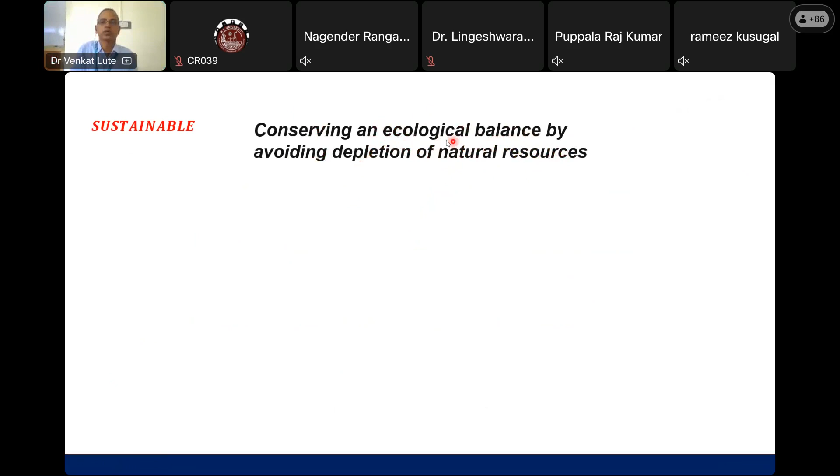Coming to sustainability in construction practices, we know what is sustainability. By definition, sustainability is conserving an ecological balance by avoiding depletion of natural resources. It's a very important aspect because natural resources are getting depleted. We need to do something about it, and there must be ecological balance. So one of the important aspects of this is steel construction.

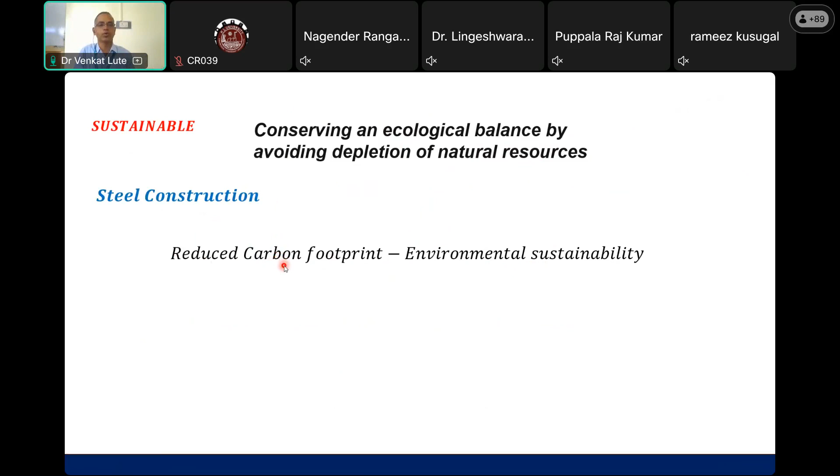We'll see how. The first aspect is the reduction in carbon footprint, which relates to environmental sustainability. If you look at concrete construction, there's a lot of carbon footprint. If we somehow avoid construction using cement material, we can be environmentally sustainable. You may ask about the byproduct from the steel industry—of course there's some problem, but it's much less compared to the carbon footprint from cement production.

We can use this byproduct of the steel industry again in concrete. Somewhere we can use it in roads and so on.

The next aspect is reduced cost and construction time, which is very important because it leads to economic sustainability. Fast construction and reduction of time basically comes back to cost. If there's a delay in construction of big projects, every day could cost a fine of 1 crore. If you do it early—recently we saw in Punjab a 40-story building constructed in 48 or 72 hours—early construction will definitely give rise to the economy. So that is again sustainability.

Next is the reuse of material. This is the most important aspect regarding natural resources. If you look at steel construction, once it's not in use, a large percentage of the material can be reused, so you're not wasting natural resources. Whereas in cement concrete, we're not able to use it to that extent—maybe maximally 20 to 30%. So this is again the sustainability aspect.

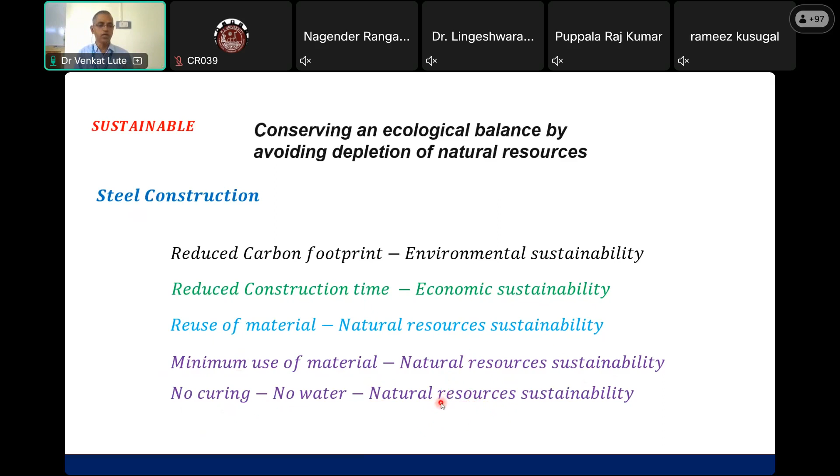If you look at concrete construction, we need a lot of water for curing. In steel construction, we don't need water. That means I'm saving natural resources, and nowadays we can see that drinking water is very scarce. So I can avoid wasting that natural resource. This way we are saving natural resources, which definitely means it is sustainable.

Now let us look at a concrete structure and how steel has come up, and how we are wasting concrete material. That means we are wasting cement, which means you are not sustainable - that is carbon footprint.

For example, I have a concrete beam supported on two pillars, subjected to a 2-point load. What happens? The shear transfers to different locations, and diagonal cracks appear here - this is a flexure crack and a diagonal crack. That means at one point I have a maximum stress zone, and at other points I don't have much stress.

So the idea came: why should I waste material? If I try to draw the stress path, the stress contour, I can see these stress contours. This red part looks like my truss - this being a tension chord, this being steel ties, and the compression chord.

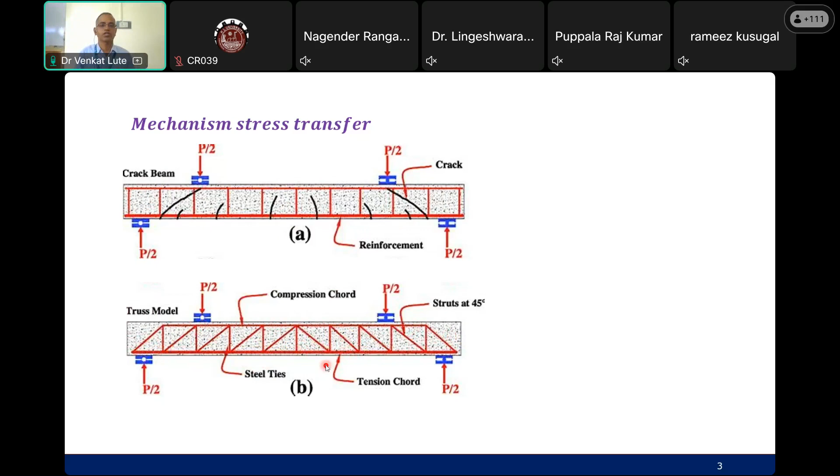Now another way I can show you how I'm able to save material, which is again sustainable - for example, transmission line towers. If you look at these towers, imagine I have a concrete structure - a huge structure. But if I use steel, the entire structure has either tension members or compression members.

In between there is a lot of empty space - that empty space is where I'm saving material. Whereas if I use concrete, I'll have to have a complete solid structure, with more carbon footprint and lot of environmental unsustainability.

Similarly, microwave towers - you see a lot of openness. Second important thing is your loads are also reduced, particularly wind loads - when wind comes, it passes through. But with a concrete structure, there are heavy wind loads, meaning a heavier, less economical structure. That's how steel structure is sustainable.

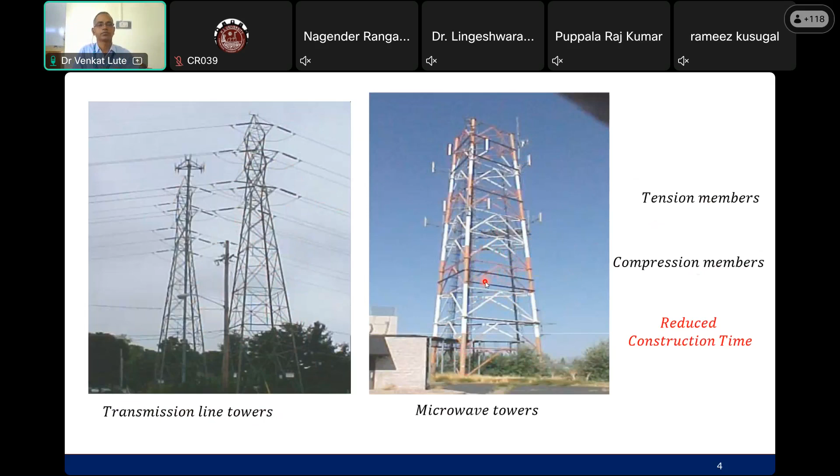This is very important. Specifically, now I am going to talk about pre-engineered buildings in my presentation. I'll start with sustainability in steel, and specifically pre-engineered buildings, which is a very important topic - pre-engineered building energy efficiency.

If you look at the structure here, are you able to see my pointer? I'm giving a pointer here - the red pointer. Anybody can answer. Sir, yes sir, it is visible. Okay fine, so I can indicate through this.

So this is the building, which is pre-engineered, and if you look at the windows with a glass facade, there's a lot of openness and lighting efficiency. We don't need daytime lighting at all, and we can open the windows for ventilation - we don't need AC. This is possible only with steel construction, specifically pre-engineered buildings. You can use solar panels, insulated panels, large windows, and natural lighting is possible - this is the advantage of pre-engineered buildings.

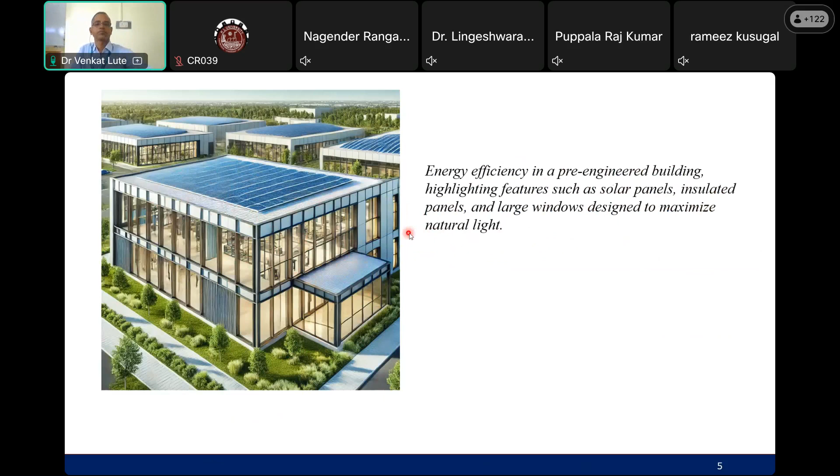Now, the question may arise - what is a pre-engineered building? Pre-engineered buildings are a type of building construction wherein the entire structure is pre-designed and prefabricated in a factory, then brought to site and assembled. So this is one such structure.

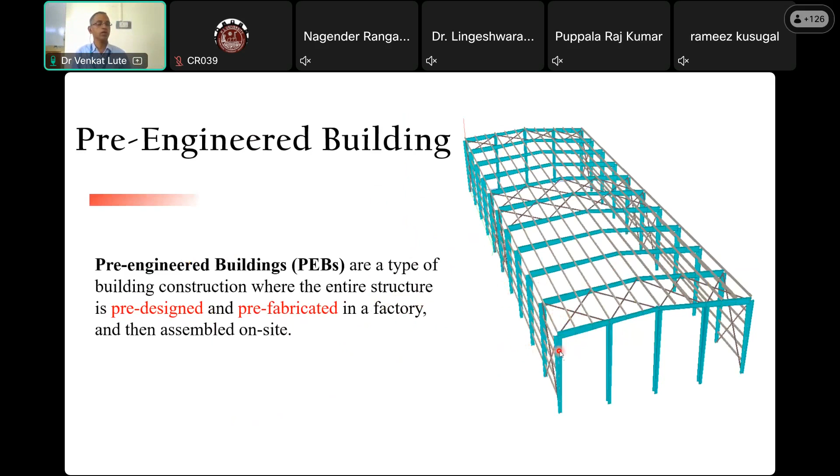So these pre-engineered buildings are generally for factories and industrial buildings, but nowadays people are going for residential buildings also. So these are the contents which I am going to present, the entire design of a pre-engineered building: full design, how to start from the basics, how STAAD software can be used to analyze and design, what are the components for design, and finally we can conclude. We'll try to go a little faster and see.

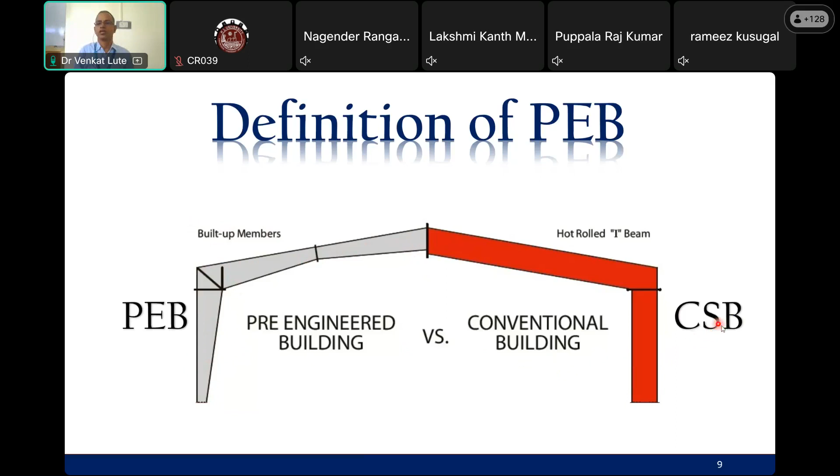So as per the bending variation, I have a cross section, that is called a built-up member. I can make a built-up section. These are called varied cross sections, meaning the flanges - I'll show you the flanges here - so the web plate will be varying from the bottom till the top. So this is the cross section variation in the PEB structure. This is the conventional steel building, and this is the pre-engineered building.

Now, if you look at the structural components of the pre-engineered building called PEB, there are a number of frames, and as per codal requirements, the first and second frame should be connected with bracings, and similarly at the end. If the length of the building is more than 50 to 60 meters, then the middle frames also should be provided with bracings. That is the stability aspect, not the strength aspect.

Now the components like the column, this is a rafter, and then this is a purlin, which is going to carry the sheet on top. And on the side, the same purlin, when provided to the side column, is called a girt, and at the ends and middle we provide bracings. So these are the components.

So each component I need to design, very important. Not only that, it is not just a component - how do you connect this column with this rafter? And there are additional columns called wind columns. These three are wind columns, only provided at the support.

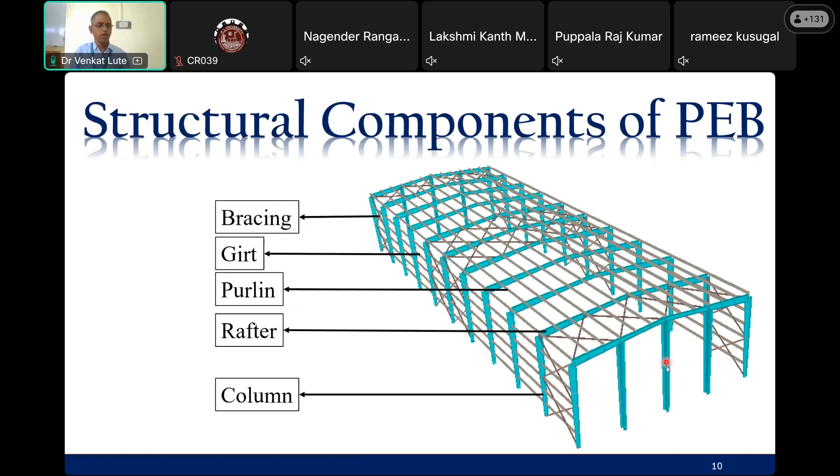I'll also show the full dimension of this building in the coming slides. Total building length is 60 meters and width is 20 meters. Each of these frames is spaced at 6 meters center to center, and the purlins are spaced at 1.6 meters center to center. This is very important for design economy - economy leading to sustainability. So now economy between my purlins and the PEB frames.

This red one is a PEB frame and this gray color one is the purlins. Now, should I increase the spacing of the purlins, which reduces purlin cost but may apply more load onto the PEB frame? So total number of PEB frames versus total number of purlins, then what is the cost? I have to use optimization here. At the same time, what is my covering material - GA sheet, asbestos, or any other corrugated composite material for covering the shed. Based on so many parameters, I have to decide this spacing. This is a very important area where I can do optimization studies, and rafter inclination could be another optimization study.

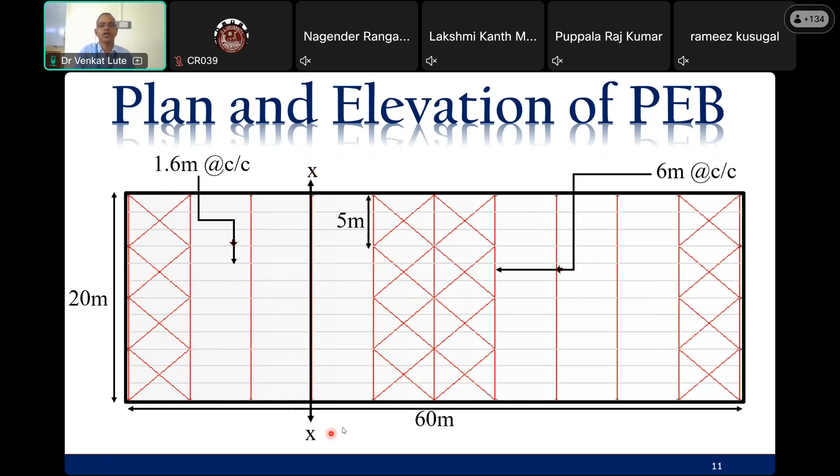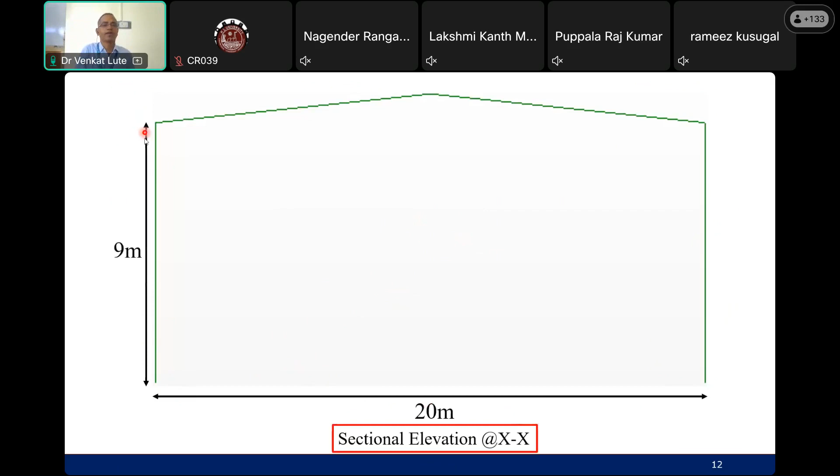So if you look at the XX section here, this is the cross section of a PEB frame, with a 20 meter width and height of 9 meters up to eave. Now total height at the peak is 10 meters, meaning the inclined portion is 1 meter - roughly a slope of 1 in 10 to 1 in 15 provided for the rafter.

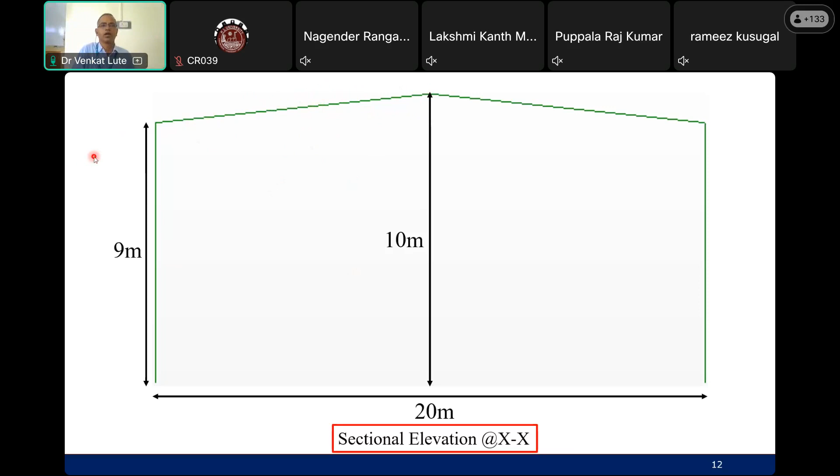This basically means you need to drain out the water properly, and at the same time you can go on top and do required services. If it is a very high slope, serviceability is difficult - maintenance becomes difficult for the person doing the job. Also, any other material falling onto it can easily slide down, which will not lead to a higher dead load onto the structure. Now the slope here is 1 in 10.

So now at the end, what I have are three different columns. This end frame is the wind column, because the end frame has to be very strong, since wind is applied onto the end frame from this side. From the other side, again this frame. So if this frame is strong enough, the rest of the frames connected by the purlins will give stability or strength to the longitudinal direction of the building. In the lateral direction, I have a lot of this rigidity from the frame.

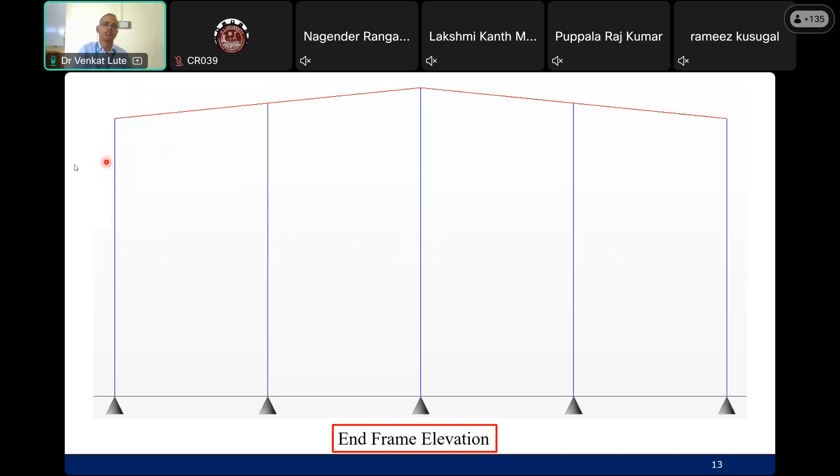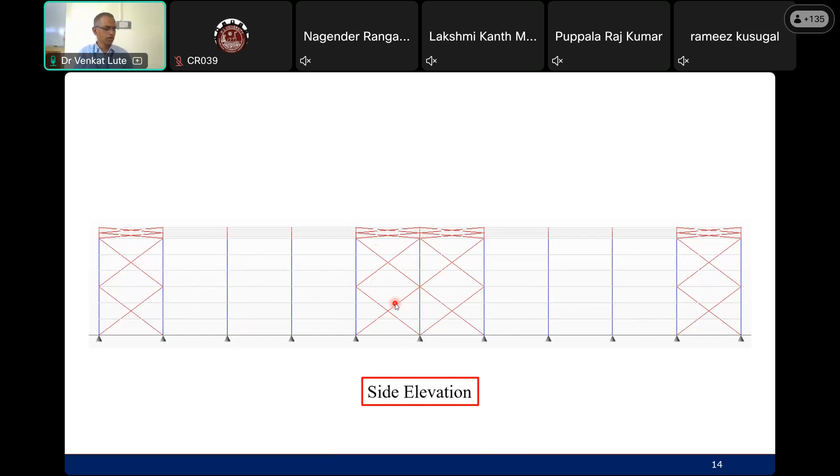Each one is 5 meters. Now this is the side elevation where I have end bracing and middle bracing. If it is an odd number of bays, then you can have only one bracing, but here an even number of bays are there, which is why two bracings were recommended. So that's the purlin spacing.

Now, how to model? For modeling purposes, we take one frame only for the STAAD modeling, using Bentley STAAD Pro Connect Edition. First we model one frame, and then of course we can give a spacing and extend it. The important thing here is at the base you try to give a hinge connection, meaning moment is zero - so the cross section is reduced. If you give a fixed connection instead, moment is very high because of lateral load, so you end up with a high cross section.

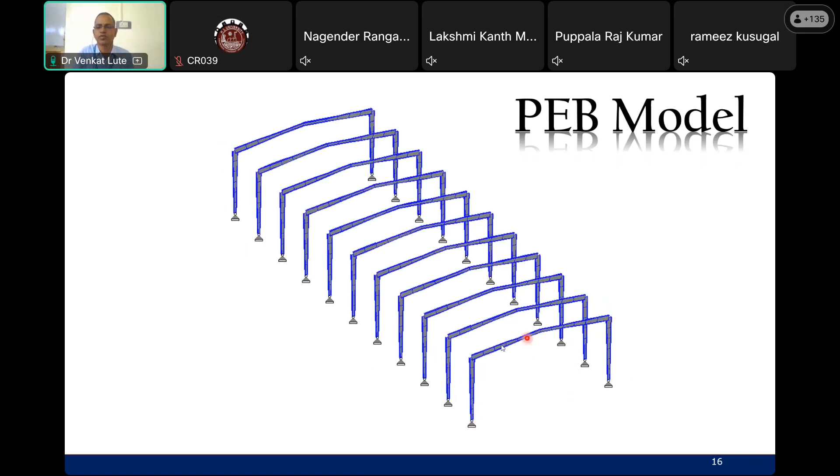So you may ask, what if it becomes unstable because of the hinge? No, because the frame width is very large. So because of lateral load, this side is under compression and this side under tension. Because of the hinge, this frame will not be allowed to lift up, and this column will give a compressive load onto the foundation.

Secondly, a very important thing to understand is that if I give a hinge connection at the support, whenever there is lateral or vertical load, the moment produced in the column and rafter will transfer into the beam and column frame, but zero moment at the end. So zero moment at the end footing means the footing is subject to pure axial compression. But if the footing is subjected to moment, that leads to a triangular pressure diagram, which may not be safe from the SBC point of view. So we always prefer the foundation to be under axial compression rather than subjected to moment. This is a very important aspect in PEB design.

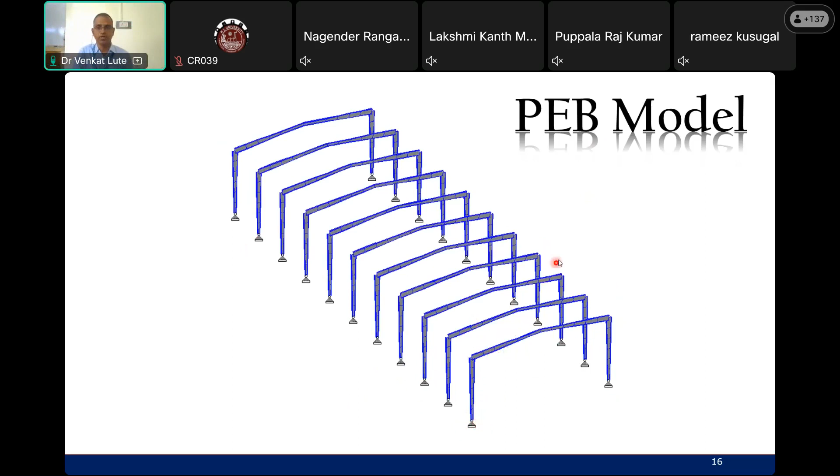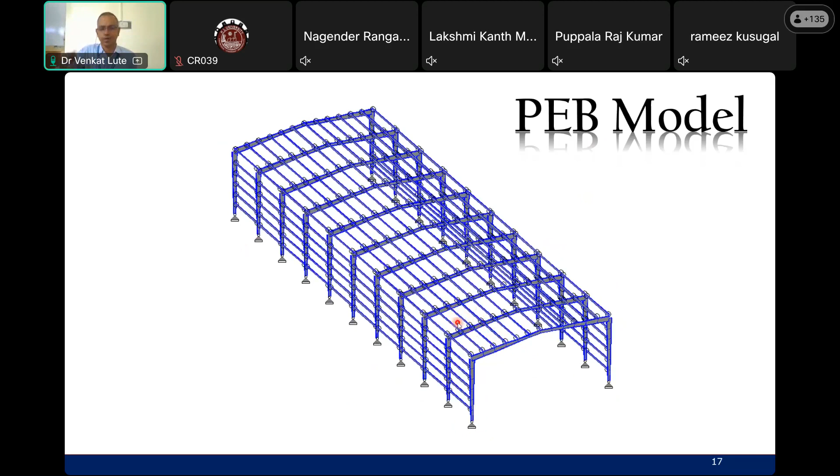So these are the purlins we model. On each purlin we gave a release so that it acts as simply supported between two frames. So this purlin acts as a simply supported beam with a UDL load, and bracing.

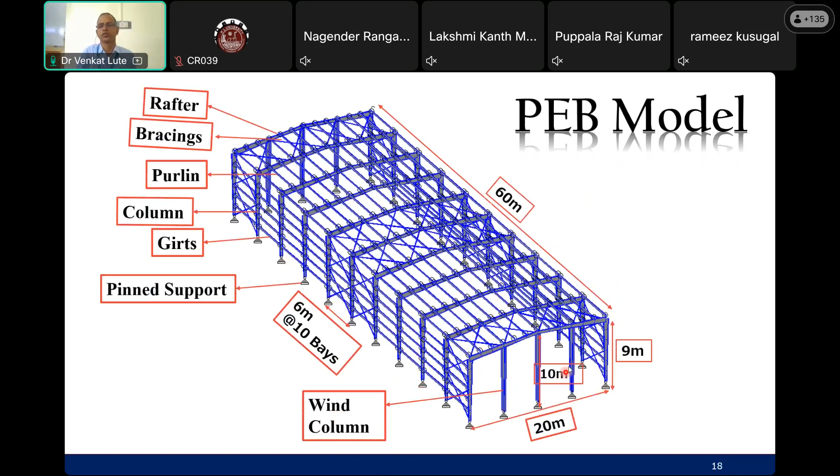Everything can be modeled one by one in STAAD. As indicated already, we mentioned wind columns. There are three wind columns, and all dimensions we have already informed you.

Now if you look at the properties, that means what cross section I have to start with - very important for the rafter and the column. So this is a column, and this is a rafter. It's also important that this rafter can be divided into a number of pieces according to your fabrication capacity, and the column can also be made into pieces, so you fabricate at your yard or shed and bring it to site to erect it. That saves time.

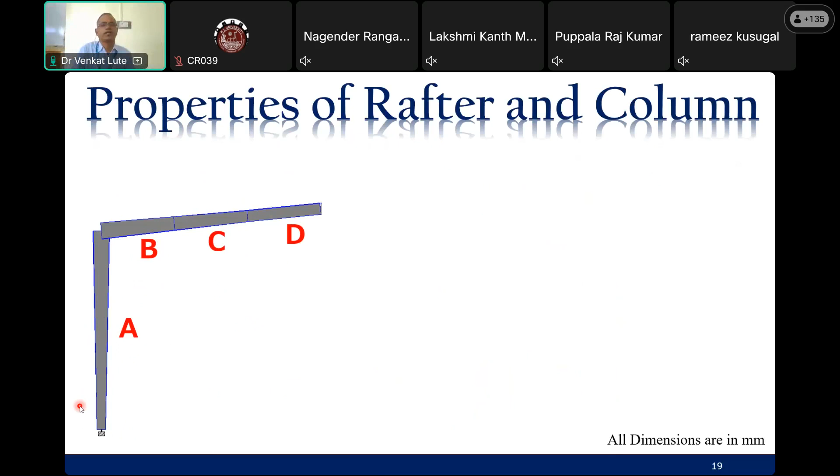If you look at the depth at each section, this 300 millimeter dimension - all dimensions are in millimeter - so 300 is the depth of the section. Flange width remains the same, and at the junction of column and rafter it's 700 millimeter, and at this junction 633, 400 and 400. The depth is varying as per the bending diagram, right?

So now if you look at a section at A, this is flange width and flange thickness. Flange width and flange thickness remain kept the same. Only thing is your web depth is varying. Web thickness is 4 millimeter only, that way I could save material. Along the height, only this web depth is being changed.

Now at B, I reduced the flange width because I reduced my bending moment there. I increase the thickness, reduce the web depth. And at section C, further reduce.

This is the initial section only, a trial section. It may be safe or may not be safe, I don't know. Once I go for the model and check the utilization ratio, then I will try to modify it. So this is section D, 150 by 8. I did not change C to D, only thing I changed is the thickness of the web.

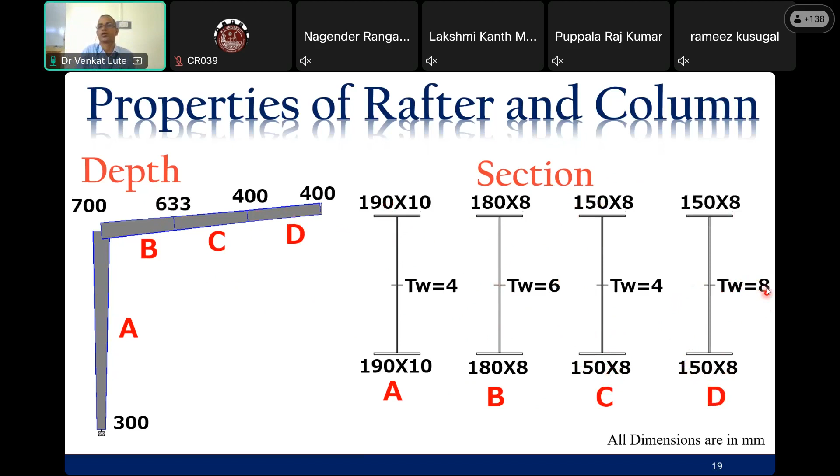Once that's done, I use the StaadPro model fully, and then I have to design a purlin. For these purlins, I use a Z section purlin. This is the Z section purlin, and this is called the lip, which gives stiffness to the flange. Very important - if I don't bend it, this flange has no stiffness.

And the thickness is very less - sorry, this is a mistake here. The thickness is 1 to 2 millimeter only. The flange width is 75 millimeter - this is a mistake here, please don't take it as thickness. This is 75 millimeter the flange width, 20 millimeter is the lip, and depth is 250. This is 2 millimeter the thickness of the web, and that remains the same.

So this becomes a lightweight structure, but by the shape, it is going to carry a lot of bending moment. That is proper utilization of material - again, this is sustainability. Make the shape a different way so it carries more load. That's how a corrugated sheet carries more load than a plain sheet. This is sustainability, and this is innovation in steel.

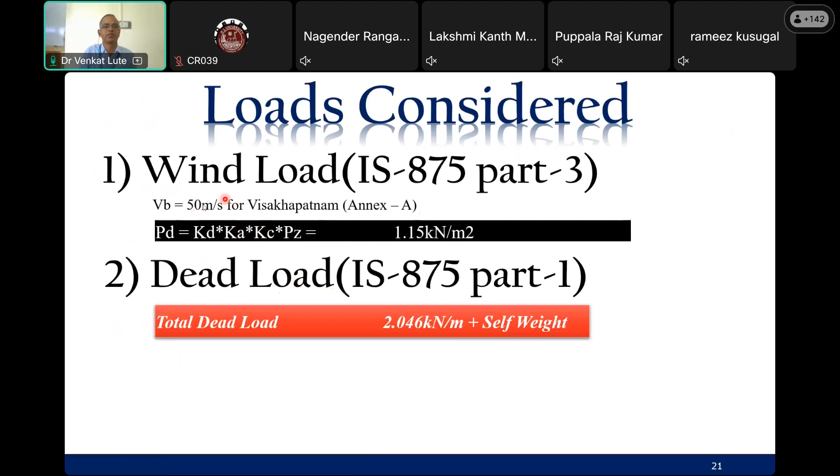So the loads considered are wind load - in the Visakhapatnam region, 50 meter per second is the basic wind speed - dead load and live load, as per IS 875 part 2. Then seismic load is also taken into account.

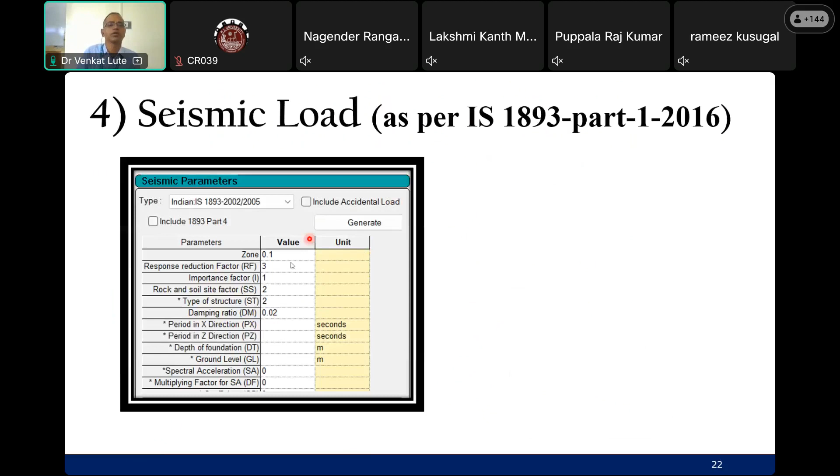Then again symmetric, so as per the bending moment I use the section. If I use the entire structure in the STAAD model versus one frame in the model, when I verified the bending moment value, not much change occurred. Although overall stiffness increased, the bending moment values didn't change. So we realized there's no point in taking so much hard work modeling the entire building - you don't need it. One frame is enough to model, and you do the same thing throughout all frames. This is the takeaway point from this study and design.

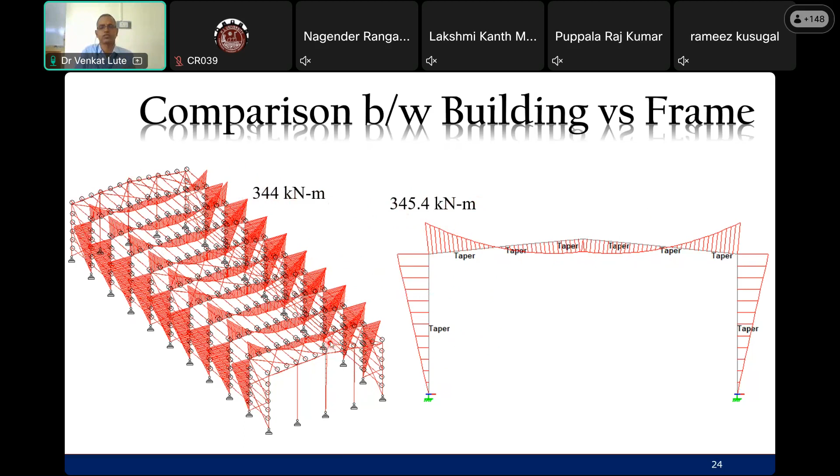Okay, so now once I analyze and know the bending moment at each section, we'll try to design. So we try to design manually as far as possible. Okay, so we start with the design of column.

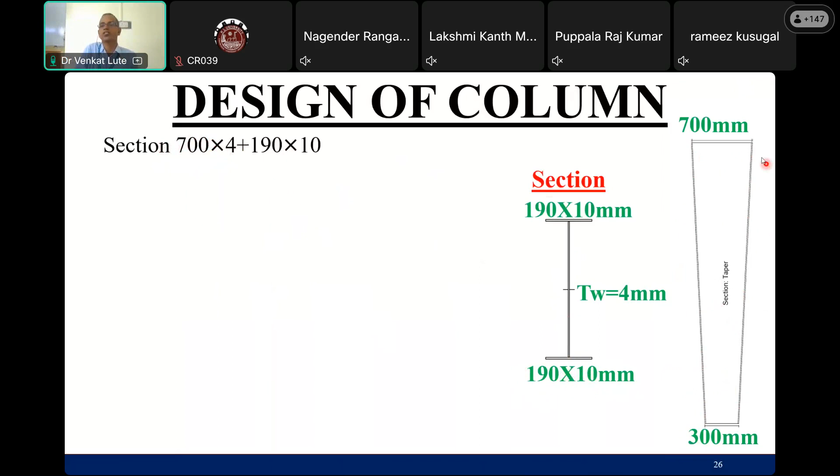So this is a tapered column, tapered section. Start at the bottom with depth of 300 millimeter, top 700 millimeter, and the depth is varying from 300 to 700. I'm keeping this flange thickness and flange width same. That means I have flanges here, so these are the flanges, and here also this is a flange. So that's how I represent it: 700 by 4 plus 190 by 10 is how we represent a section in the column.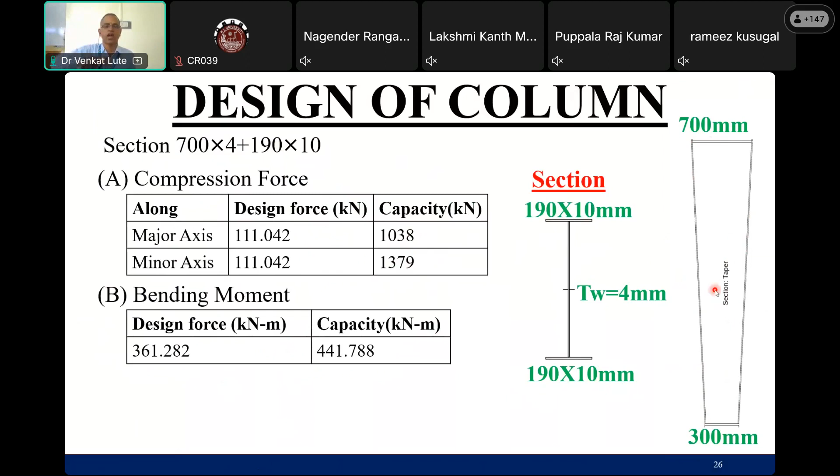Reduce cross section, so this is an indication. Fine, so let us look at bending moment on the column. So the moment is 361 kilonewton meter, but the capacity in bending, either major or minor, whatever, is 441. So a little closer. Although axial compression is different there, moment is governing here. Since the column is subjected to moment as well as axial force, I have to use combined action, right?

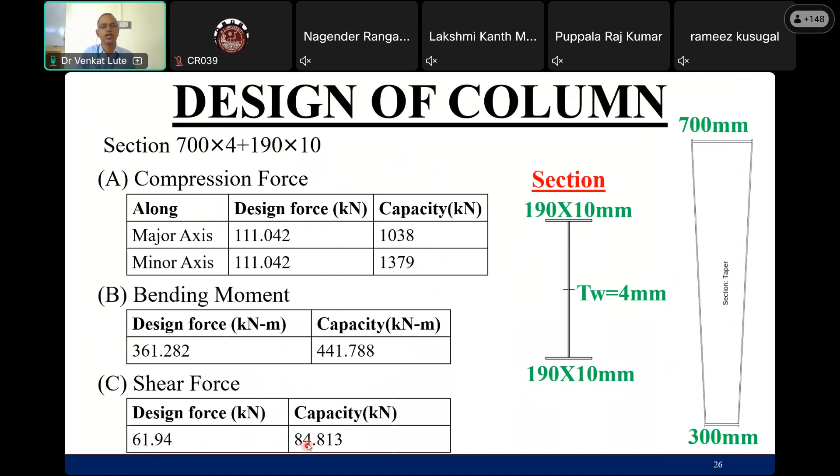So if you look at the shear also, shear force is 61, and the capacity of the section under shear, because moment divided by length will give me shear force, so it goes like this: 84, which is also closer, right?

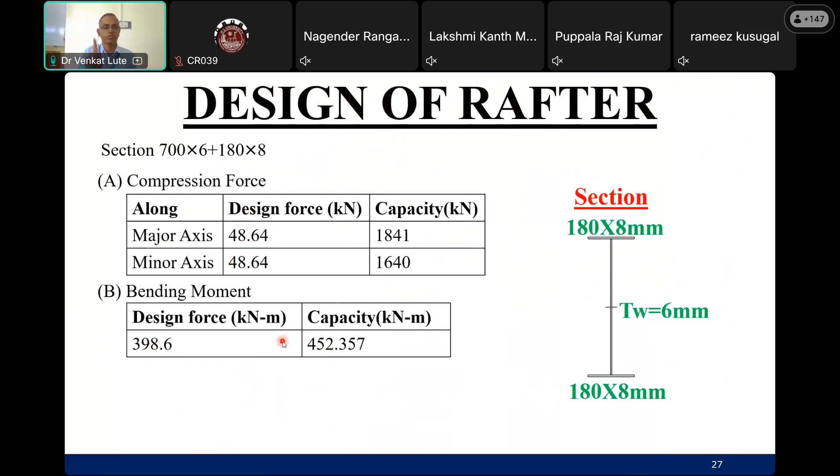Even for our concrete column, the concrete column is sufficient without reinforcement also. But when it comes to moment, because the column is subjected to bending moment, your reinforcement is required. So that is the reason for axial force you provide minimum reinforcement, but for bending moment we need heavy reinforcement.

So bending moment 398, roughly 400, is 452, very close. The shear force in the rafter is 100, and this is 284. It is little far away, so more than 2.8 ratio.

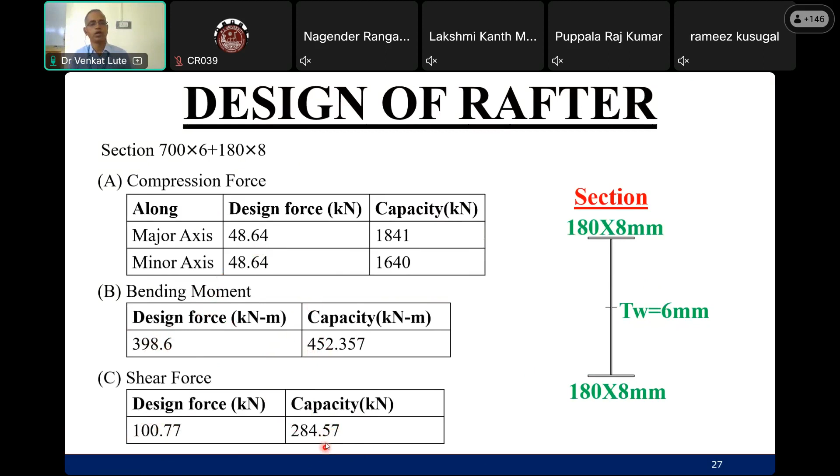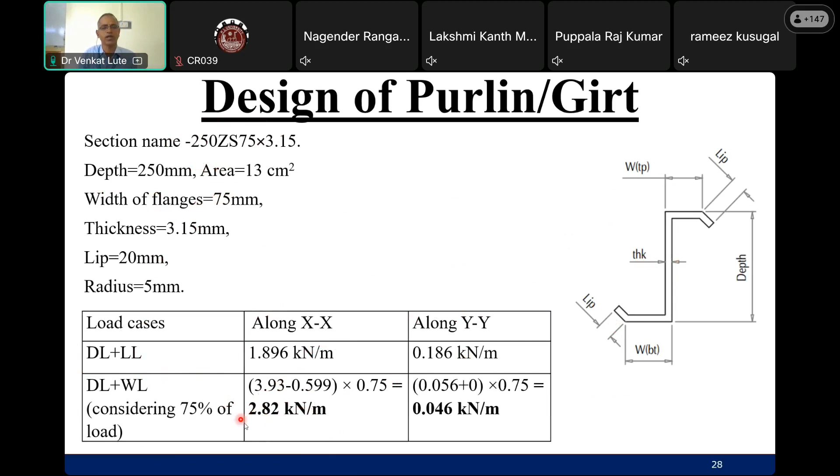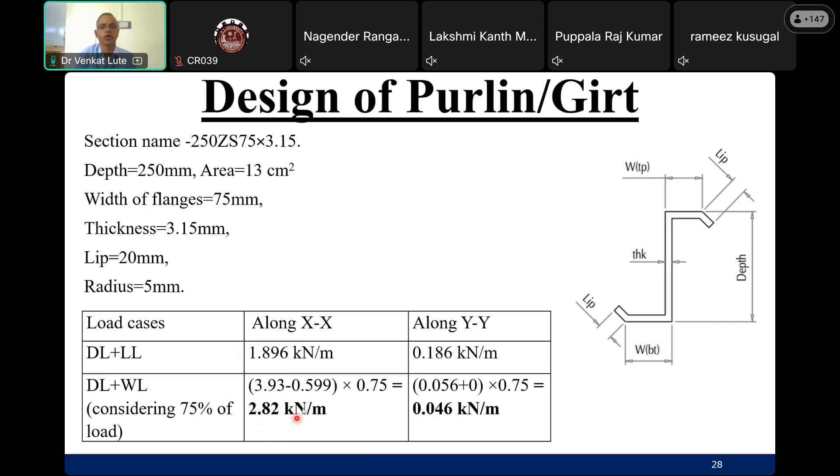Okay, now look at the purlin. Purlin section, which is a Z section purlin, which is there in the stud also. Okay, so these are the properties. And if you look along the XX direction and along the YY direction, different directions for the loads, I saw the loads acting on the purlin 2.82, and along YY, that means because the purlin is inclined a little bit, along the rafter and perpendicular to the rafter, that's what it means. So this is perpendicular to the rafter, which gives higher loads, so we need to design for this. Of course, we have to design for that smaller load also. So if you look at the governing criteria...

Now the bending stress in the purlin is 83, allowable is 207. Because try to understand, purlin is a cold formed section, so we cannot go by the bending moment bending stress; we have to go for the allowable stress. Working load method you have to use. Allowable stress is 207.

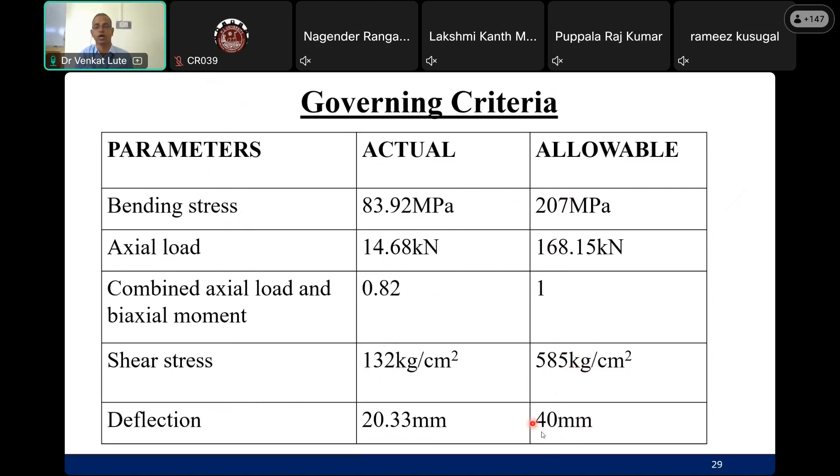Axial load on this is 14, actually very high capacity, meaning allowable. So axial load and bending combination is 0.82 actually, and allowable is 1. So still there is a gap. Shear stress is 132, allowable 585, so it is more, permission is more. Deflection 40 millimeters allowable, but I have only 20 millimeter.

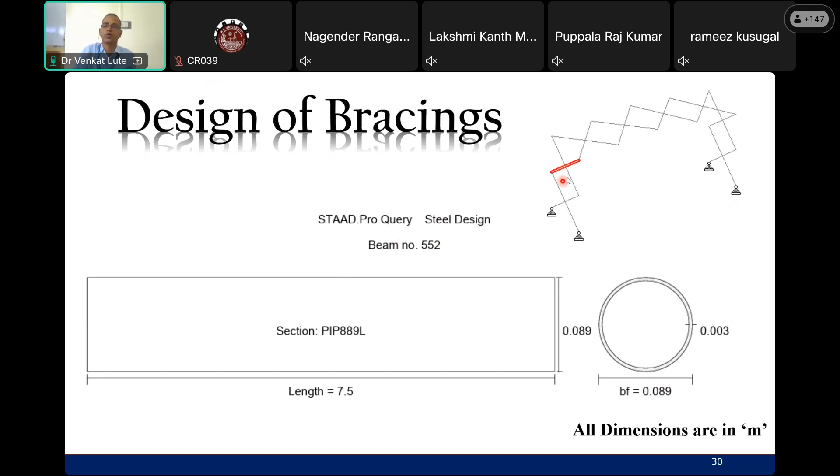So then go to the bracings. The bracings, which are from the first frame to second frame, first bay and the last bay and the middle two bays. So the section is this circular hollow cross section, and this is what, and maximum one of the sections we take and try to get the forces, and try to see how much the forces are.

So this is compressive force, right? Design strength, then critical load. So if you look at, 22.09 means 22 compressive force, tensile force 195. So the bending, z direction and y direction, and this is a capacity. So I have capacity there. Now if you see whether this pass or not, ratio 0.6 critical, which is slenderness ratio. So this means the section passes. This is axial in tons, the force is given in tons. Here is kilonewton and here is ton, force is given here.

So coming to bracing, the other bracing, this one bracing we saw, this another bracing. So similarly verify that bracing, what is the critical axial load and how much is the resistance.

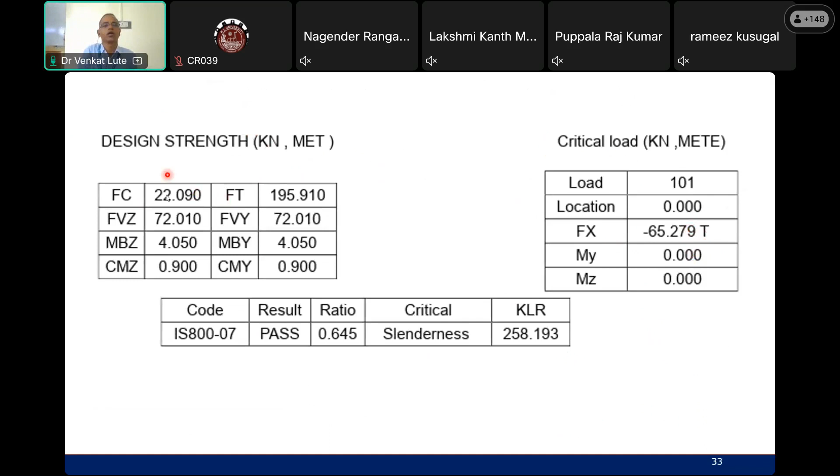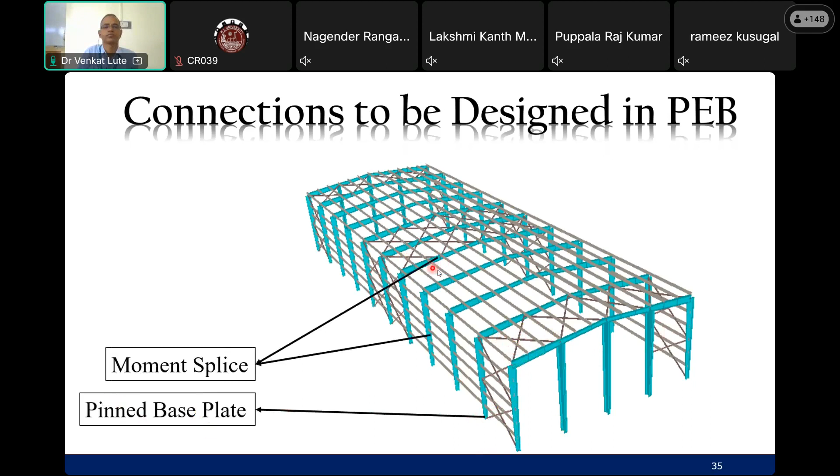Now connection, because without connection the entire PEB is waste. So in the connection, that means connection between column to the rafter, within the rafter two sections you have to connect, and the rafter to the purlins, rafter to the bracings, and so on, and the foundation. And the first is your pin base, the base connection, base plate, and here is the moment splice. And here is a beam column joint, beam column flange joint, and here apex point. How do you connect? Because I have a wind column at the middle, so apex splice we say. So each of that, and the bracing joint here, the bracing connected to the column. How do you connect?

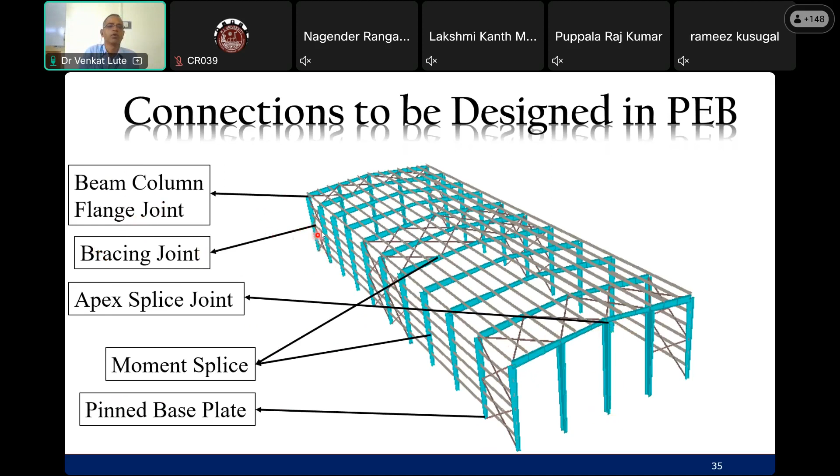So each of them can also be modeled in the connection design of STAAD. There is a connection design available, so we can design there.

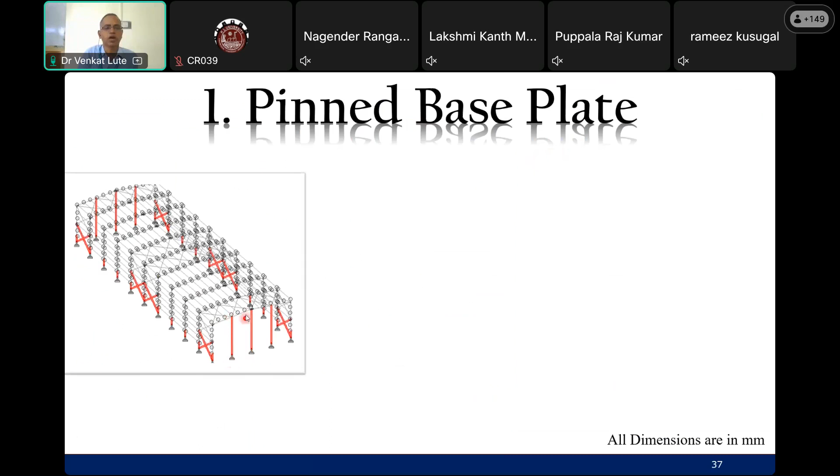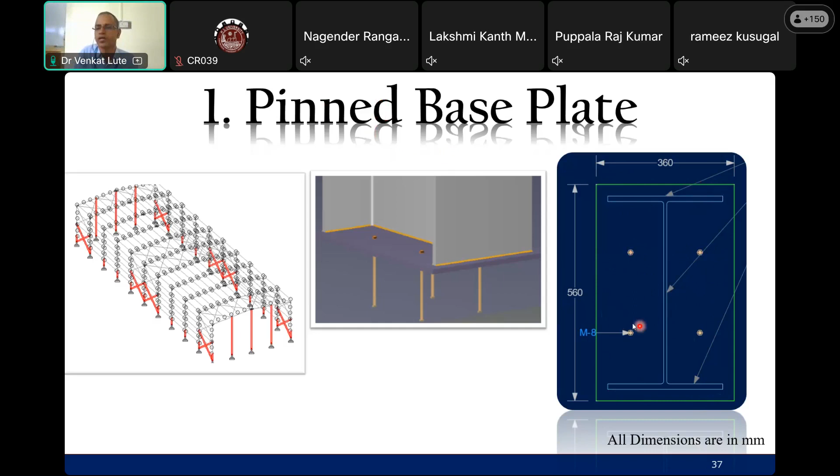So in the connection, pin base plate, each of this column having pin base, you select those sections. After selection, we can look at the cross section and the number of bolts. So the connection design gives you the number of bolts. This bolt provided at the in between the section, that means they are hinge connection. But suppose your connection is fixed connection at the bottom, so these 4 bolts will be provided after the section here. If you provide that, they are acting as a fixed connection, fixed base. But since we said pin base plates, the bolts are provided very closer to centroid of the section.

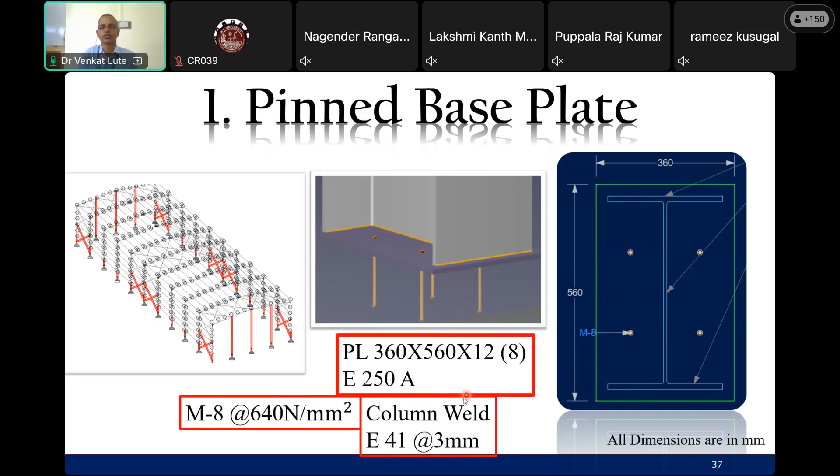Then accordingly, I can take M8 bolt. And then column needs to be welded with a base plate with a 3 weld and section, so on. And if you look at the governing criteria, capacity is 6, demand is only 0.1. Here capacity is 5, in the yielding tension demand is 5, so it is safer. For the column point of view, weld resistance demand is only 58. I am having capacity of 397, so that is safe.

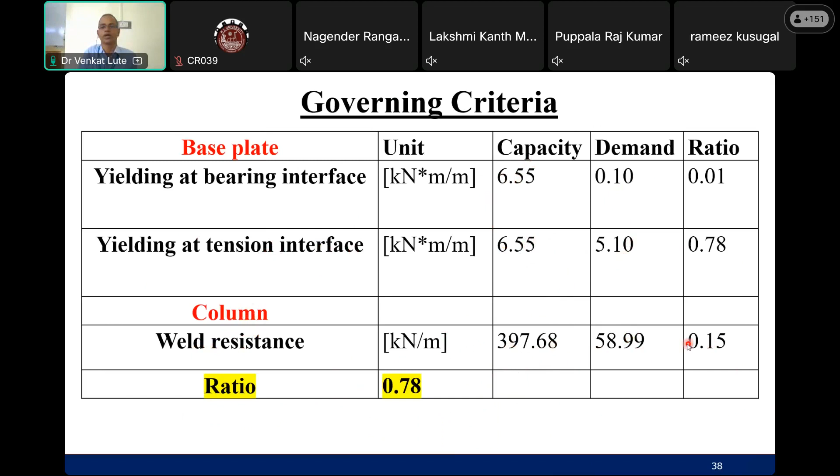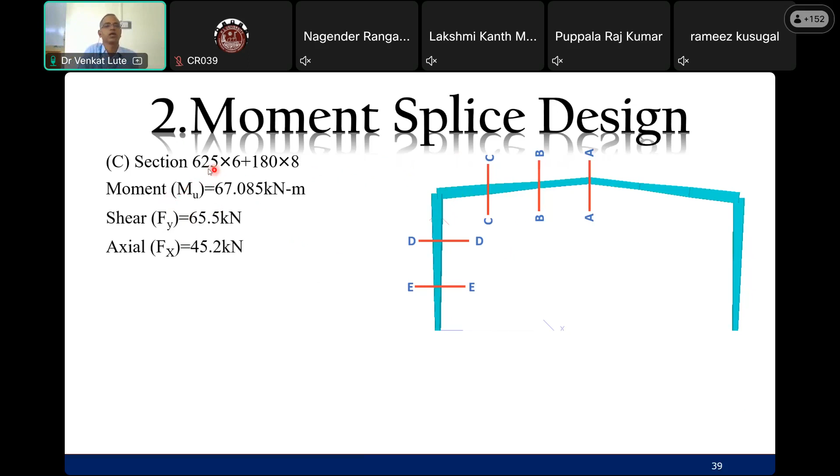So now the moment splice connection, which is, if I can also connect entire column, which is 9 meter, into 3 pieces, and the rafter also into 3 pieces. So the moment splice means two members joining, and the member subjected to bending moment, axial force, and shear force. So how do you design the connection?

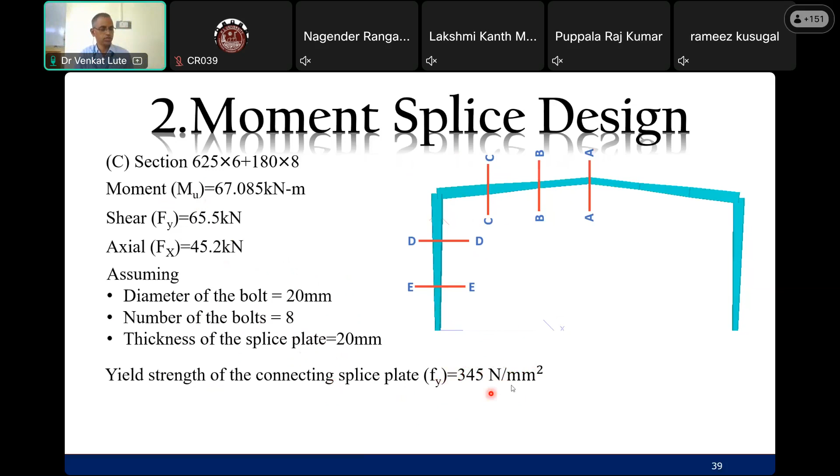So the section is subjected to moment, shear force, and axial force. Now I need to design the connection. That means I need to have a face plate, I have to have bolting connections, the number of bolts, diameter of bolts, and thickness of splice plate. This is basically we start assuming and try to get the forces. The yield strength of the connection plate is assumed 345 Newton per millimeter square, that is MPa. Generally, the entire structural steel used in the industry or even our buildings is 250 MPa, whereas for the PEB, generally 345 MPa is used. This is suggested by Phelps Pennar. They are using this.

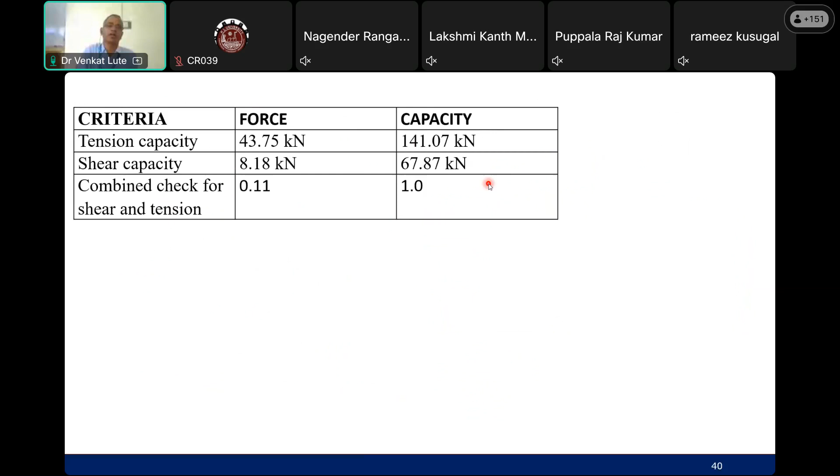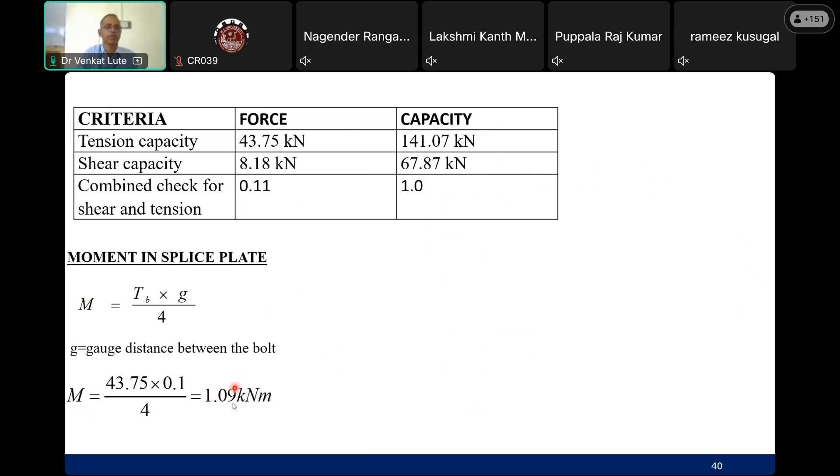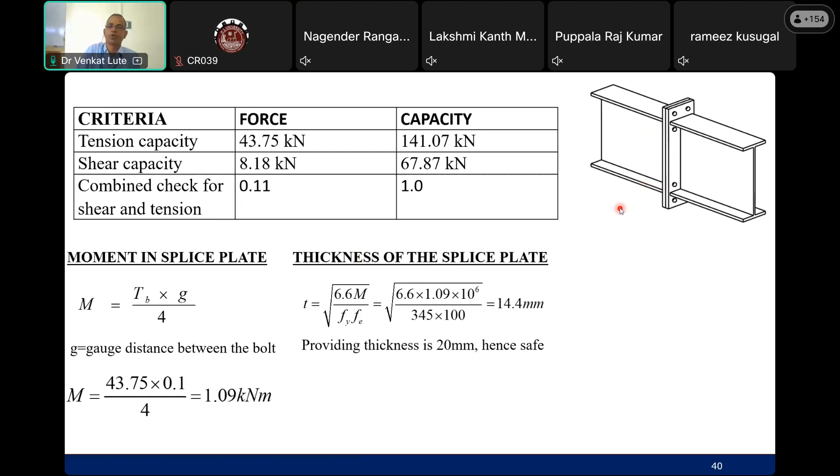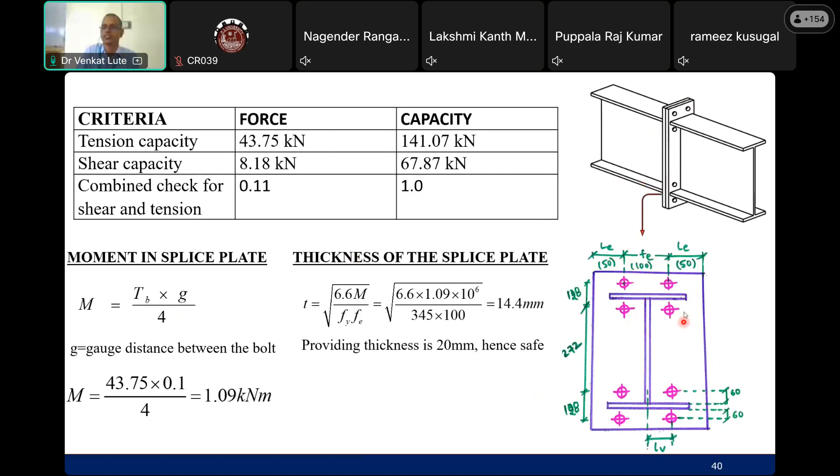So now again, this is a force coming. This is the capacity of the section at the connection, the moment splice. So how much is the moment coming, and we are trying to carry out the bending moment required from that. And thickness of the splice plate is designed as 14.4 mm, I provide 20 millimeter. This is called the rafter, and this is a moment connection. The splice plate means this plate, and number of bolts, so diameter of bolt, everything we need to design like that. So here top 2, bottom 2, and before section also I have to provide total 8 number of bolts, and we design the size, the distance between them, because I need to have a minimum edge distance as per IS 800. So then beam column flange, because there is a rafter there and there is a column, so how to connect them?

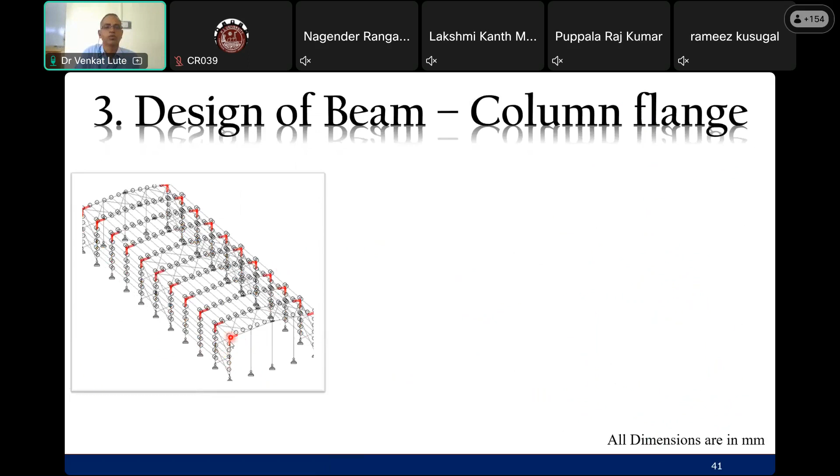So this is how you have to design the beam column flange. The column is vertical and rafter is inclined, so there must be some via media to connect them so that I should not induce extra force.

So this is a plate. One inclined plate has to be designed, and a welded plate like a stiffener, because it has to transfer shear onto the column by providing a stiffener on both sides. And this is the face plate, one below the rafter, another above the column, and they should be connected. This will be subjected to shear force, so the rafter will slide over that.

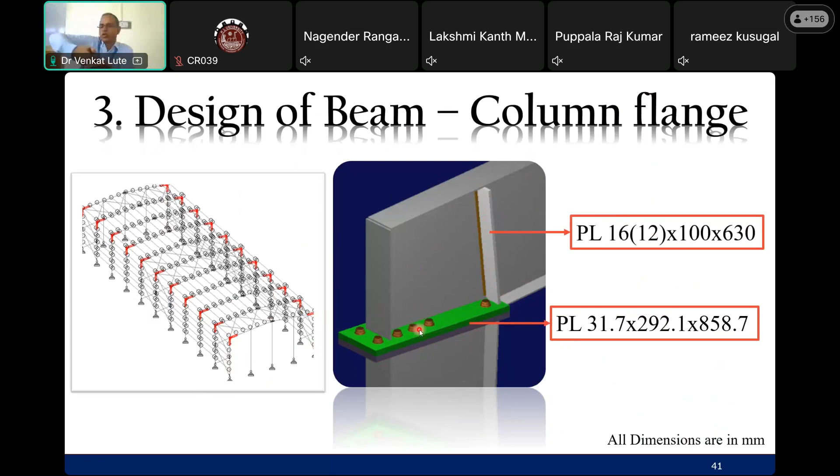Okay, so the diameter of bolt, and these are the governing criteria of the entire connection at the beam column joint. So we can see the ratio.

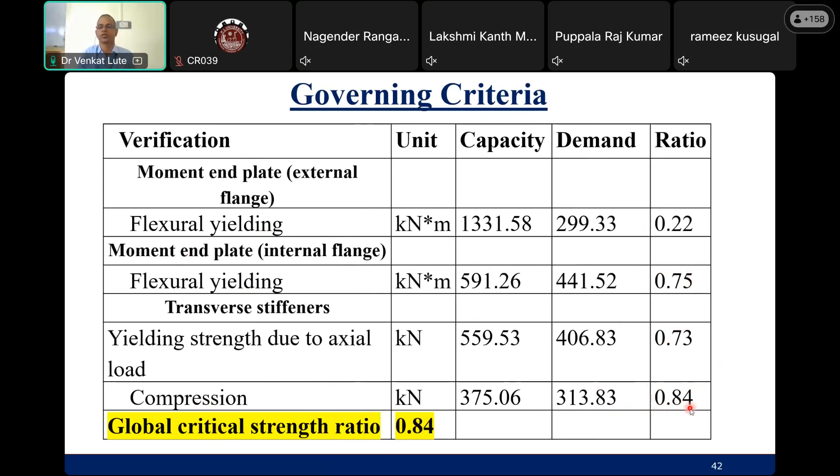In compression, as I told you, here 0.84 means you are utilizing roughly 84%. So the global critical strength ratio is 0.84. Although on the flexure side it is lesser, here you are reaching almost this value, so you have a cushion of only 16%. It is always better to have some cushion in the design.

Okay, then apex point design, design at these points. This particular point is subjected to shear, so there will be vertical shear there, and there is a bending moment. These two plate thicknesses you have to design, and all these bolts will be subject to shear force.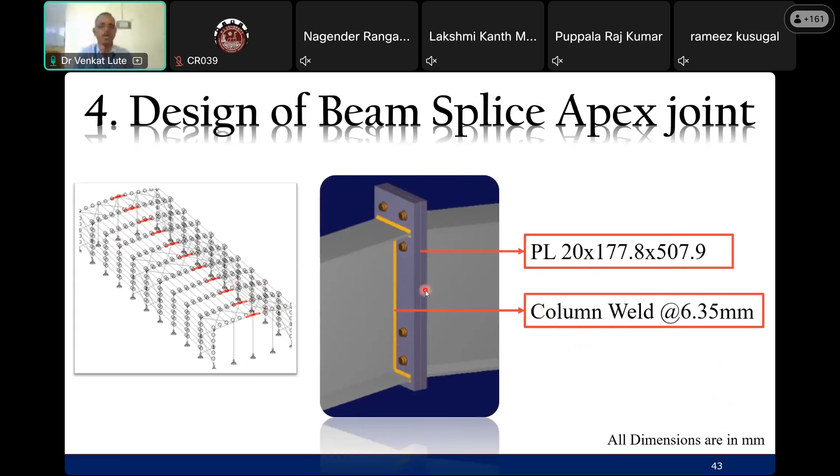So you assume a plate and weld this plate to the column. Then between two columns you provide bolts, so they should not shear off. So you design the number of bolts required. Okay, then look at the criteria.

Bolt shear capacity is 318, demand is only 8, because these two columns, the rafter members, are going with an incline. By virtue of their connection and holding, they will not fall. So a lot of shear force is carried by section, not by the bolt, because they are inclined. If they were horizontal, the full shear force would have been on the bolts. But since it is inclined, by virtue of the inclination, the force is transferred not onto the bolts but onto the section. That is why demand on the bolt is less.

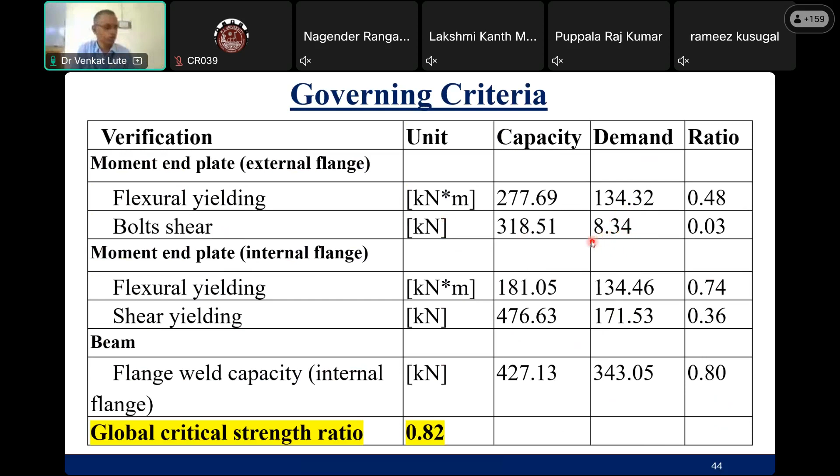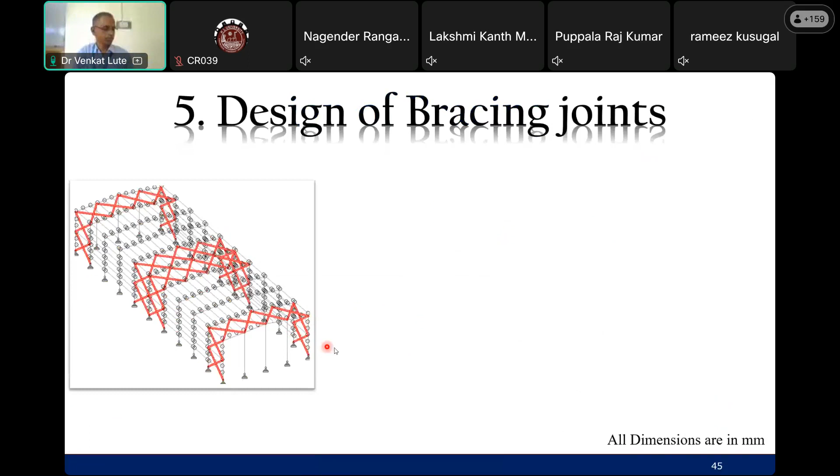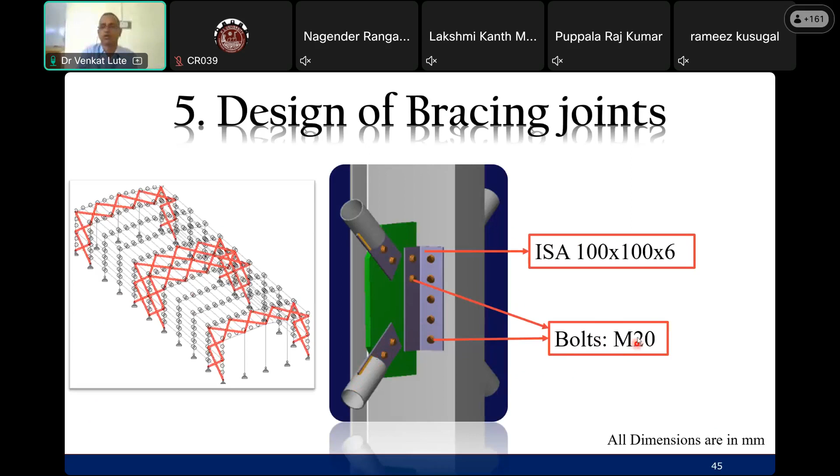So also take an angle there and use M20 bolts, trying to find out the axial force onto the bracing. Because of the axial force onto the bracing, this is subjected to shear, so find out the bolt shear capacity and provide the bolts. And this is how, if there are two bracings coming from both sides, you try to design that connection. Then the governing criteria for that.

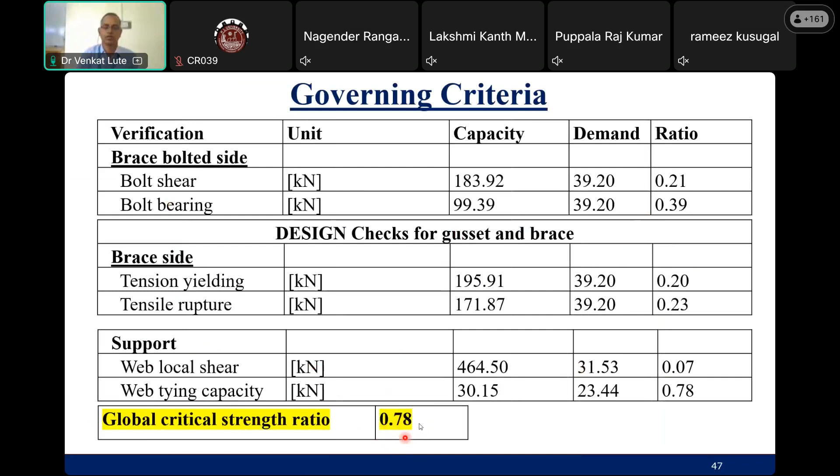So I am having the strength ratio as 0.78, almost 70-80%, which means 20% cushion is there. So this is better, to have cushion.

Steel takeoff statements. So finally, how much is the capacity? Primary members weight is 24 ton and secondary members is 17 ton. Secondary members means the bracings and purlins.

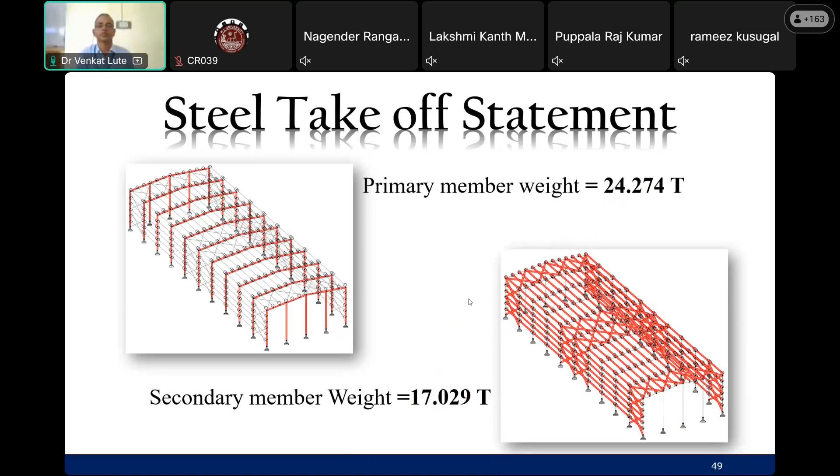I told you in the beginning, the ratio between them is very, very important. Primary members are the basic load carrying members in the lateral direction. Secondary members are the purlins, which are the vertical deadweight carrying members. So they are almost closer, which is why optimization is important.

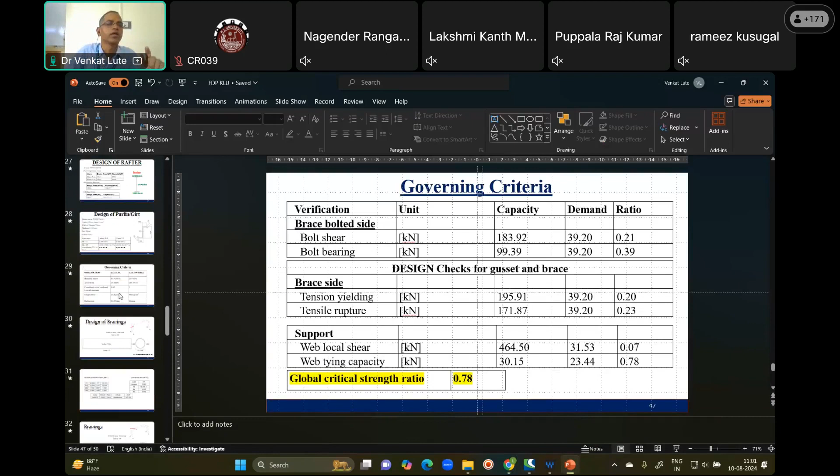In fact, after Hudhud, a committee was formed and they asked to design even the connection between the roofing sheeting and the purlin. Otherwise they used to do some small drilling with screws, but after that they had to have a proper design for the connection also. Even our window panels also.

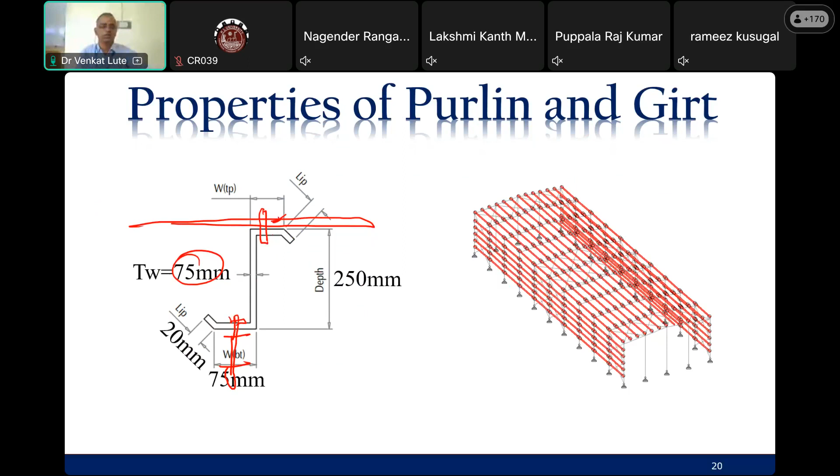So simply inserting a window into the wall is not enough - you need to design that. So definitely design is required there. We need to design that. Okay.

Is it clear? The roof fading part may not happen if you design properly, but we cannot neglect it. In steel structures, nothing can be neglected - even one bolt cannot be neglected.

We saw during Hudhud, just after it, we visited many of the steel structures in Visakhapatnam. Maybe Dr. Chaitanya may be aware - I don't know if he was here at that time. So somewhere near the steel plant here, Auto Nagar...

There was a PEB structure - the column from the foundation just lifted up and went up. The foundation is there, the column is there, but the distance between them is maybe 5 to 10 meters. So there was a fault in providing the number of bolts. Only the end columns got lifted up. So it's very important - everything is important in steel structures.

How to calculate the expected load of solar panel for a grid system on a 20 feet height steel structure? It is recommended that solar panels face perfectly south. So your building has to have that orientation, and whatever inclination is required, you try to make the same inclination for your roofing and attach the panels so it is as good as the roofing material.